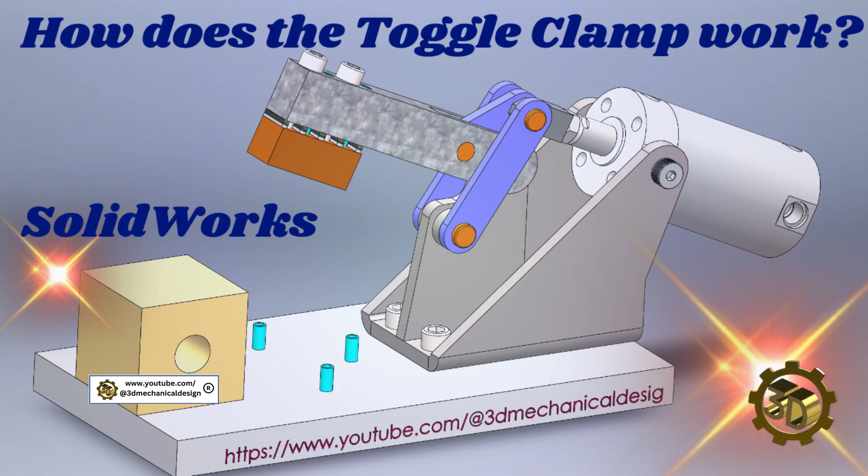Today I'll show you how the toggle clamp works.

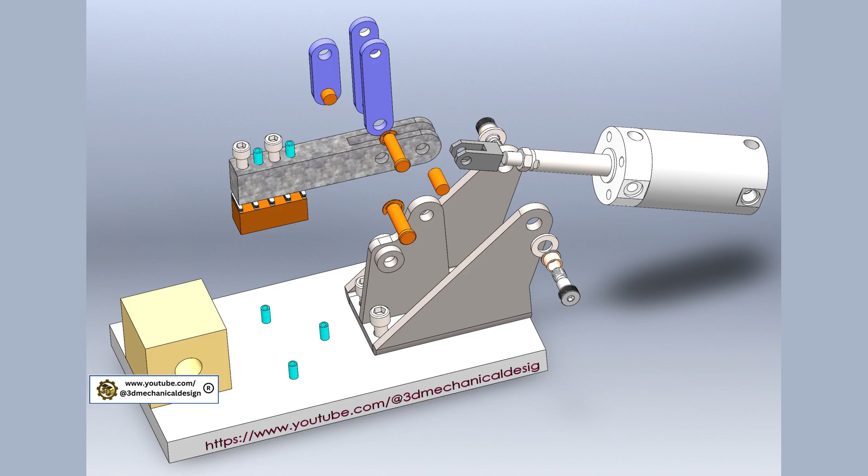Let's get started. What is a toggle clamp? Toggle clamps provide quick, secure workpiece holding through a simple lever linkage mechanism. They lock firmly with minimal effort due to their over-center design. I modeled the air-powered hold-down toggle clamp.

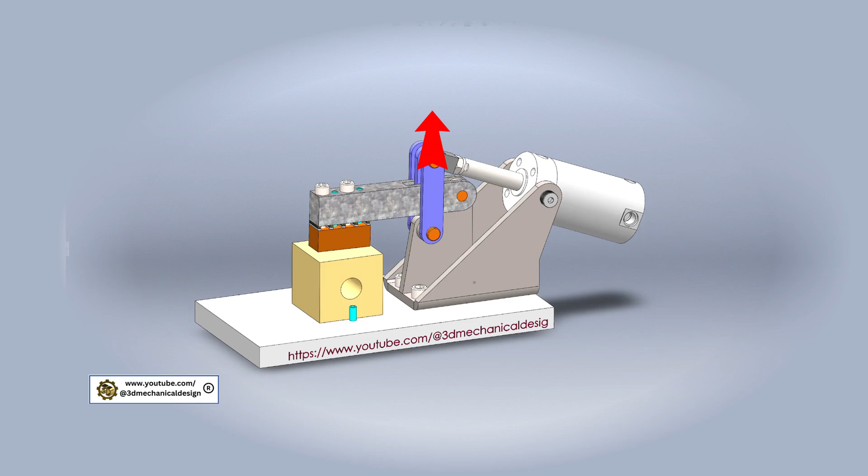Directing force straight into the fixed base pivot for a strong lock that resists vibration or load. This over-center alignment creates high clamping force, often hundreds of pounds, while requiring perpendicular handle motion to release, so workpiece pressure doesn't unlock it.

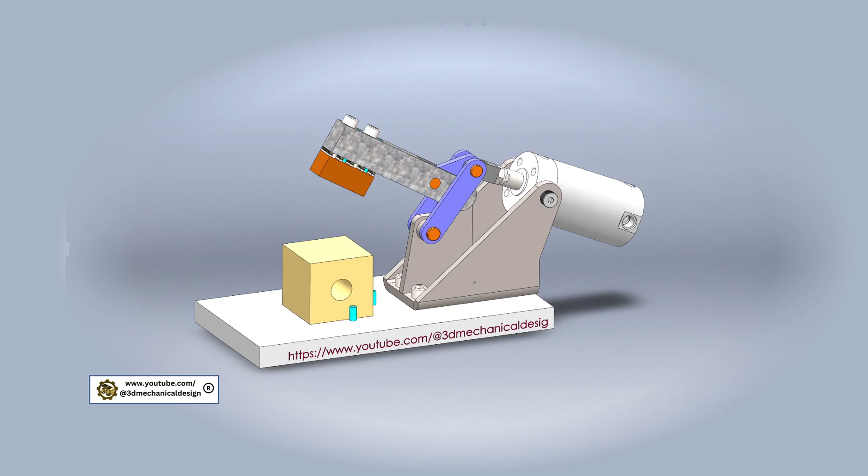Let's dive deeper into building our toggle clamp assembly. We'll break down each component. Base and bracket setup. Start with a sturdy base plate for mounting the entire assembly. The first component is the bracket, which will hold the main components. Secure the bracket to it using 4 mounting bolts.

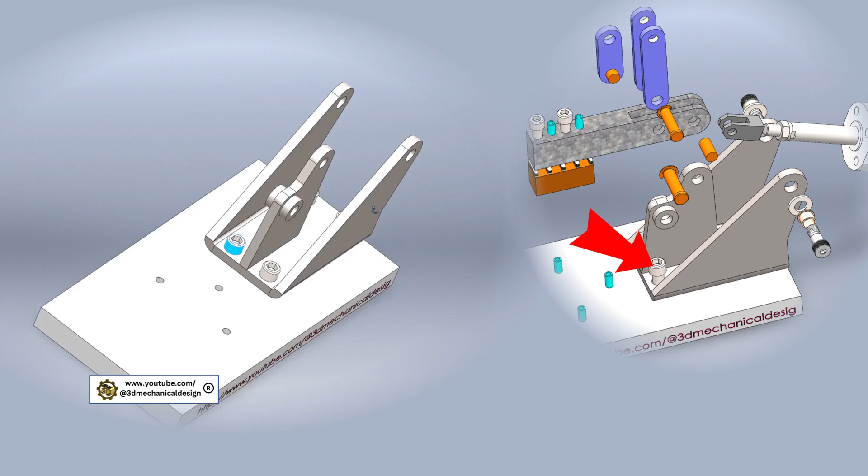This bracket cradles all pivots, ensuring over-center lockup aligns forces directly into the base. Cylinder installation. Mount a pneumatic cylinder, here 2.5-inch bore, 3.5-inch stroke for compact action, to the bracket. Align it with the pre-drilled holes on the bracket.

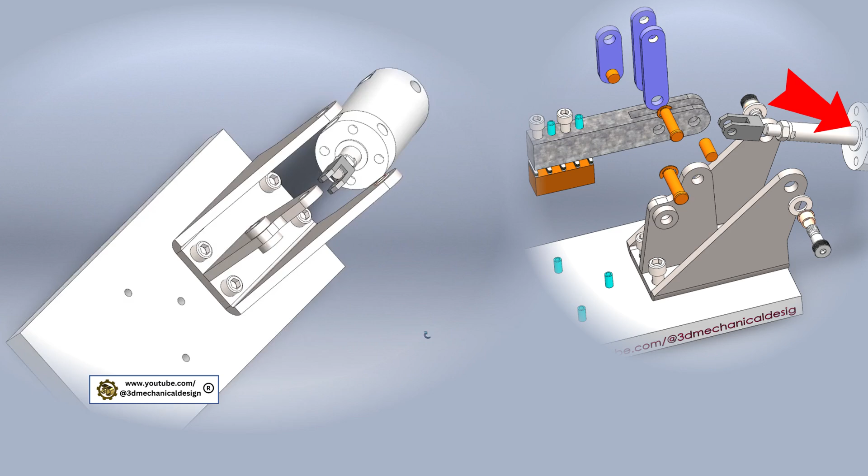Then insert flanged sleeve bearings, followed by washers. Secure with shoulder screws; they allow free rotation under load while the cylinder rod extends precisely 3.5 inches to drive linkage motion. Repeat on the other side.

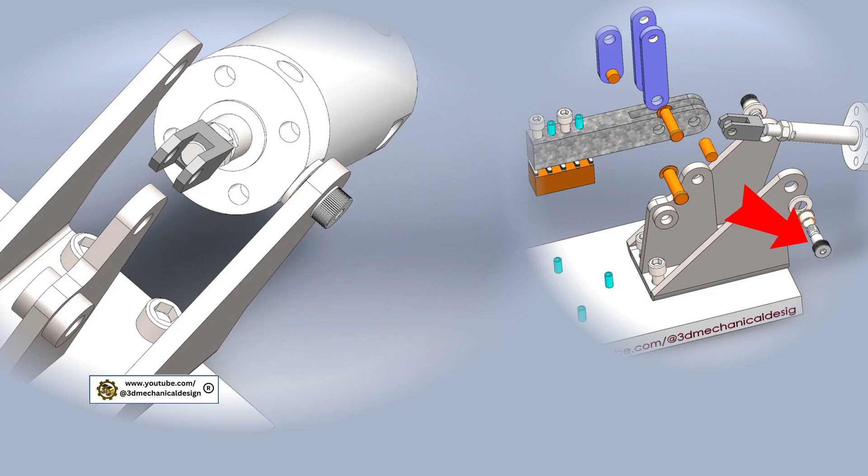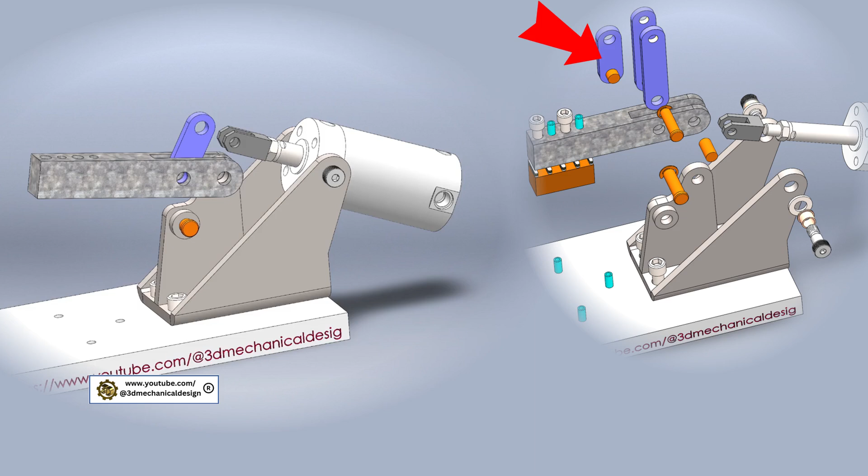Linkage and arm assembly. Attach the main clamping arm to the bracket's upper pivot hole using a hardened steel pin. Connect the first linkage between the cylinder rod end and arm midpoint with shear-resistant pins. Add the next linkages and steel pins.

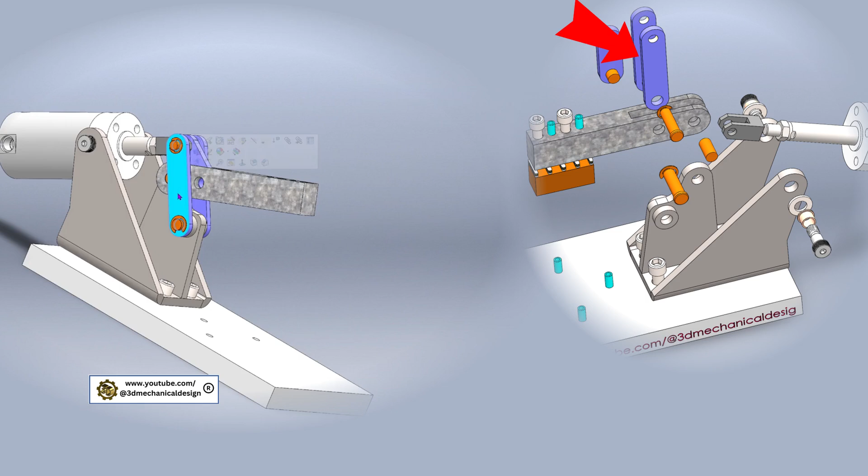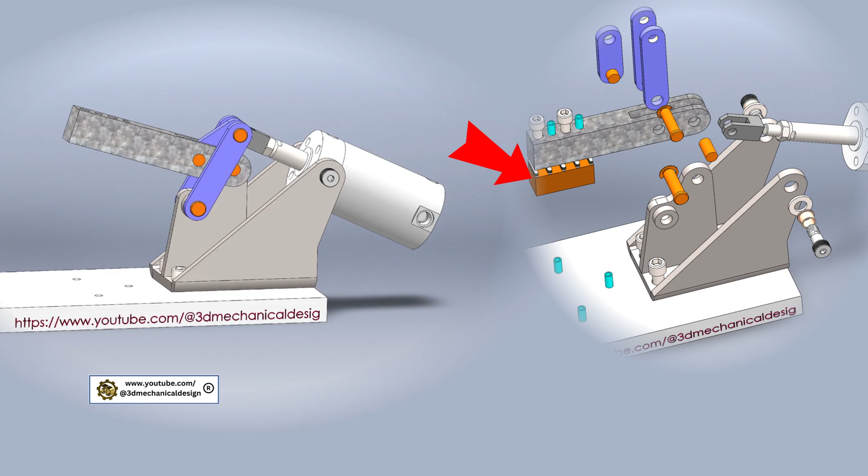Pressure plate finishing. Bolt the pressure plate to the arm end, adjustable via stackable shims, 0.5 to 2.5 millimeters thick, for exact workpiece height. Secure with 2 cap screws and 2 dowel pins to prevent slip under dynamic loads.

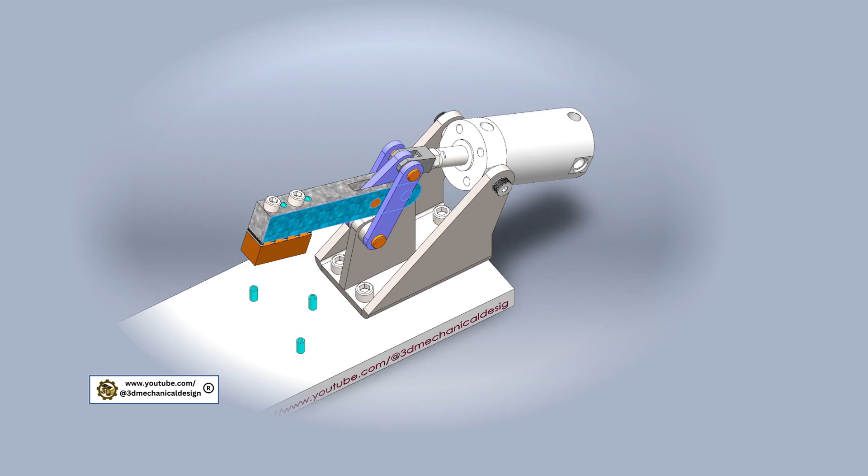Test by cycling. Extend the cylinder to lock, linkages straighten, retract to release.